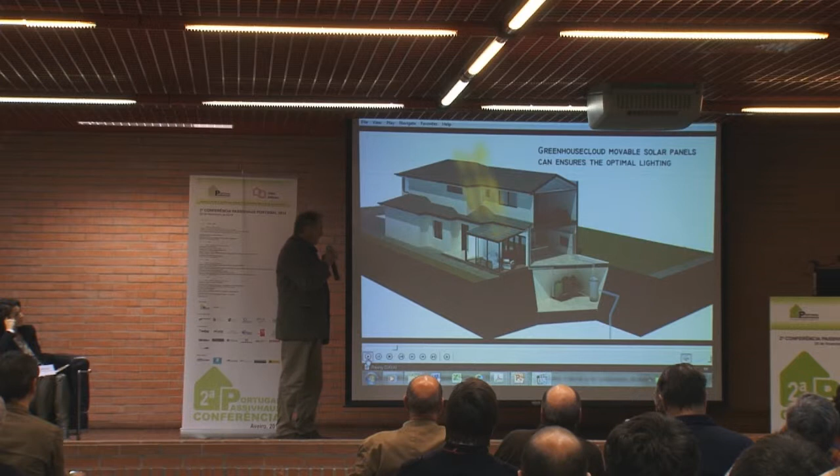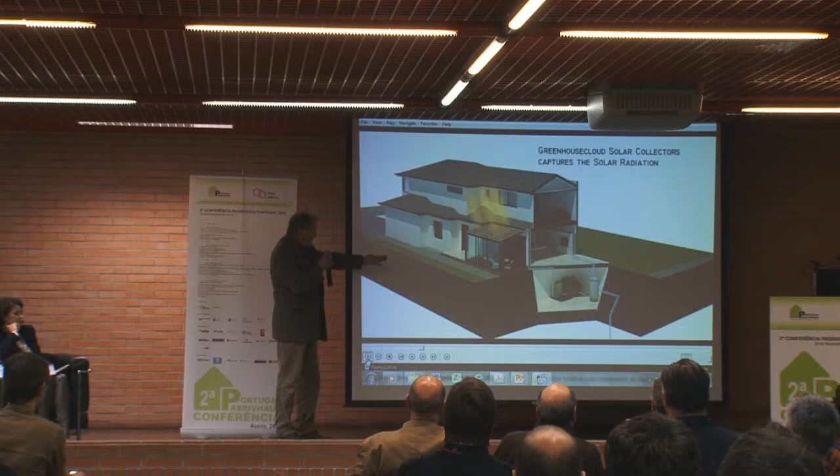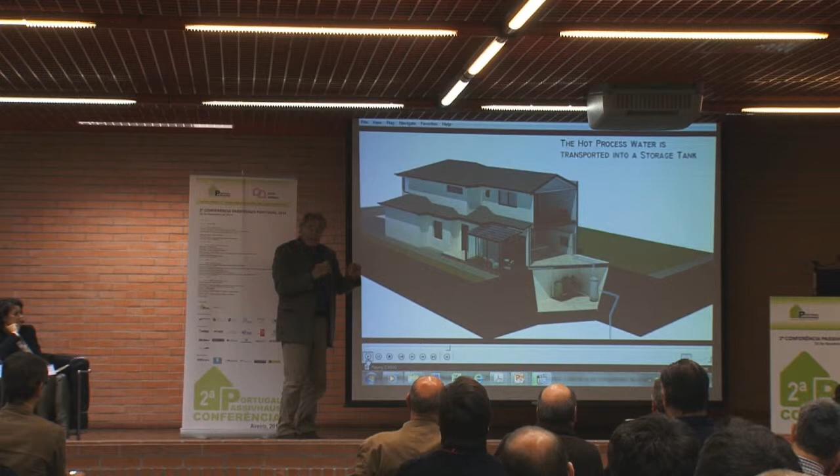So schematically, we see the winter garden here, and the sunlight falling on it. I will explain a little bit more later how we are filtering this radiation. A little part is coming in because, as you know, if you have full sunshine, you have about 100,000 lux of radiation, and you need only 2,000 lux maximum for our eyes. So if you have 2% transmittance, the rest is changed into heat.

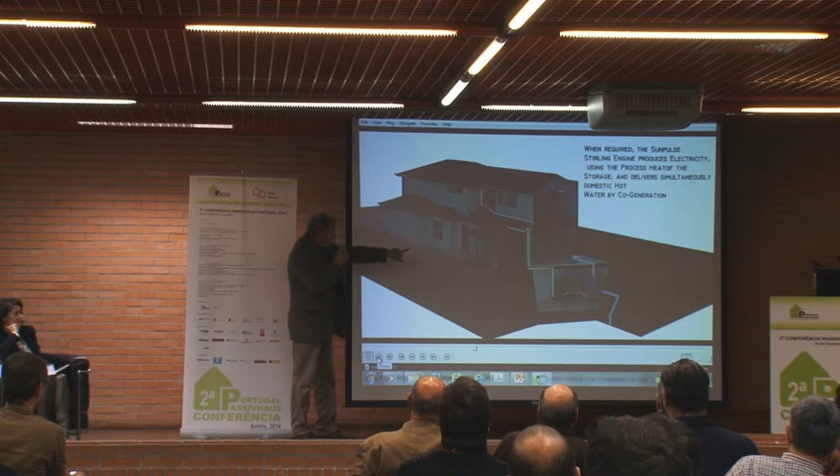That heat is going into storage. We developed, together with Tamera, very novel types of low temperature Stirling engines which are already capable of running on heat between 80 and 150 degrees centigrade, producing day and night electric power, and at the same time, as a cogeneration system, providing all the heat required in such a house, which is symbolized here.

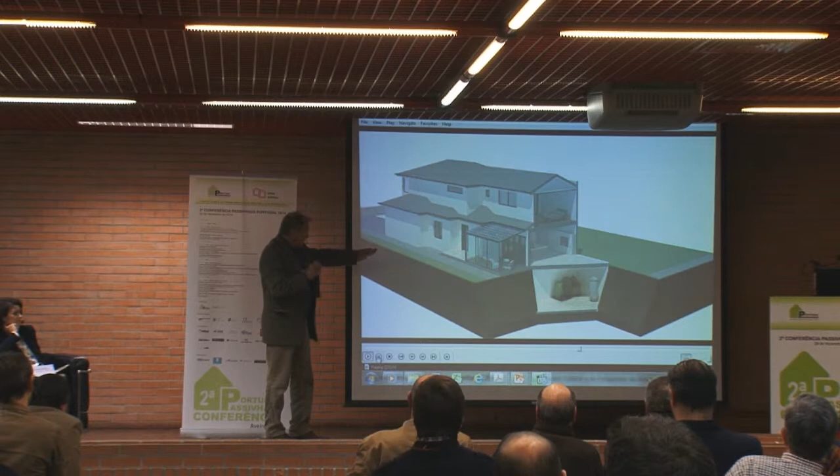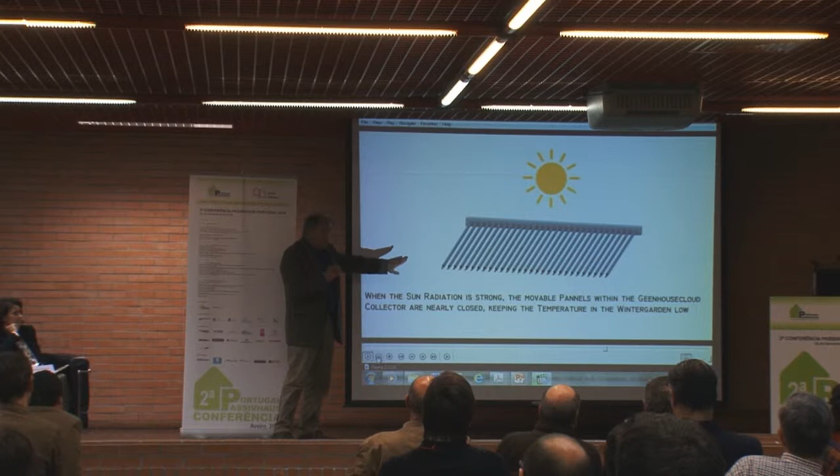As I will explain a little bit later, we can build such an envelope. Now we are coming to a little picture. You see here schematically evacuated tubes which have a U value better than any insulation you can describe, but which have movable elements inside.

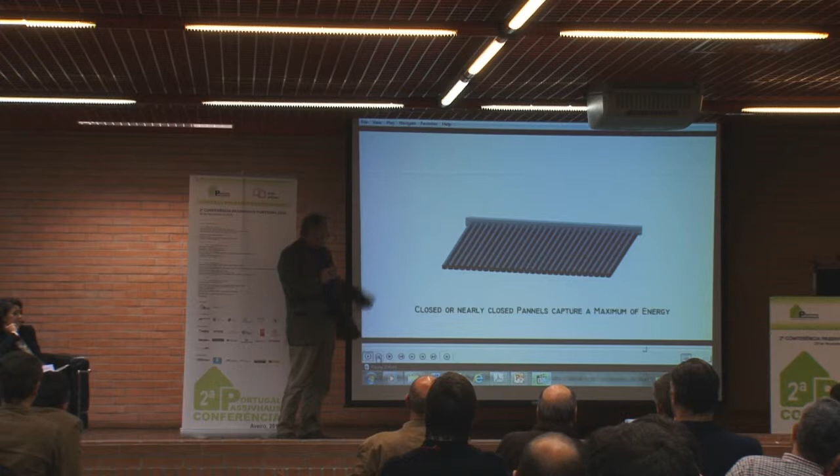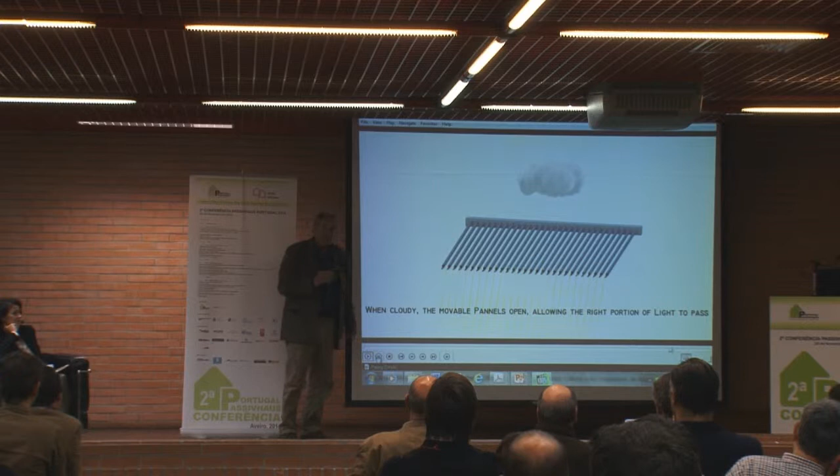These movable elements are the producers of heat energy. You can produce heat at 150 degrees centigrade, pressurized hot water at 5 bar, with 50% efficiency. Some of them are photovoltaic, used directly when there is enough sunlight to produce electricity. The weak point of photovoltaics is the storage, as you all know, in terms of cost.

Therefore... what happens? The movie is finished.

The combination of a thermal system which stores the heat coming out of such an envelope as low temperature heat, transforming it day and night into electricity, into cooling, or whatever you want, while taking advantage daytime of the very low cost of photovoltaics today, is a good approach. At the same time, turning these lamellas controls exactly the amount of light you need coming in.

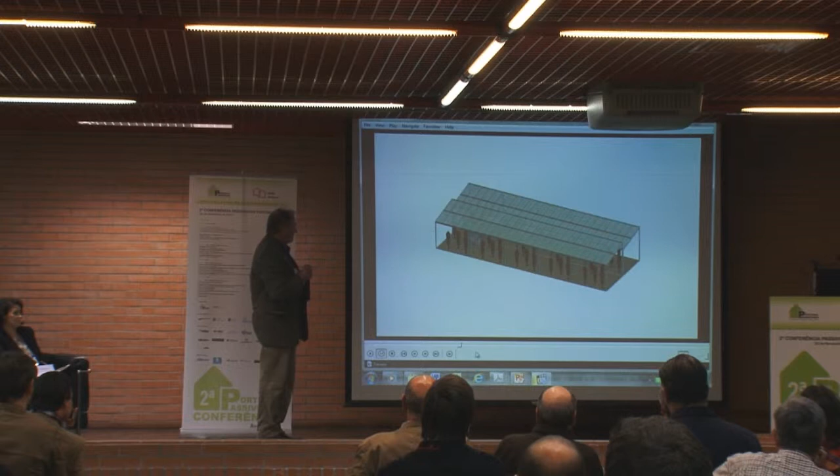Now we are going to show, I think, okay. Yeah, let's move in. You see, let's go to the Stirling engine. Of course, such things can be built as pergolas for plants and so on.

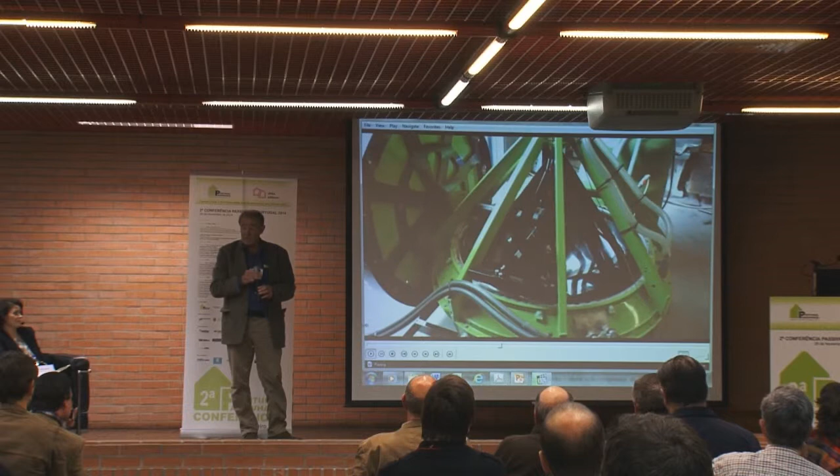Here you see, just from the lab, an example of a low temperature Stirling engine, which in this case is run from the heat of only 80 degrees centigrade from the factory where we produce it, and it's pumping water.

So the design point is 150 degrees, and we have such engines at the moment in the power range between half a kilowatt and 2.5 kilowatt.

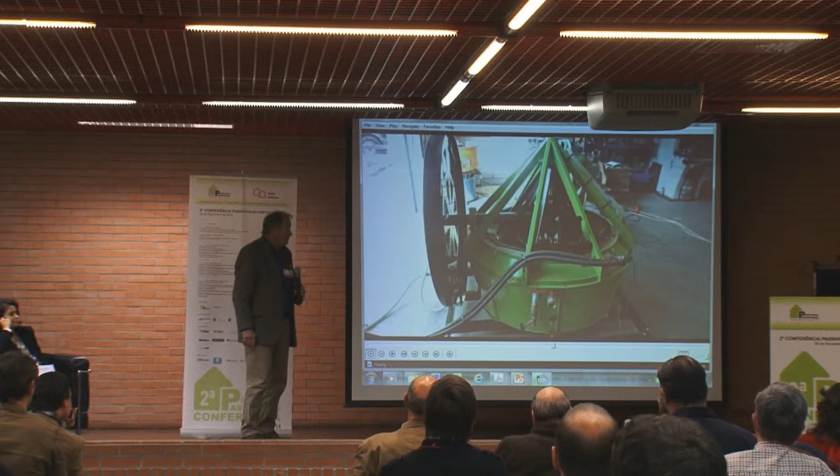Stirling engines are very simple engines, and we developed them to be capable of working already at very low temperatures. They are simply filled with ambient air and have two heat exchangers: one taking heat from the hot storage, and the other, the cold heat exchanger, delivering hot water to the house.

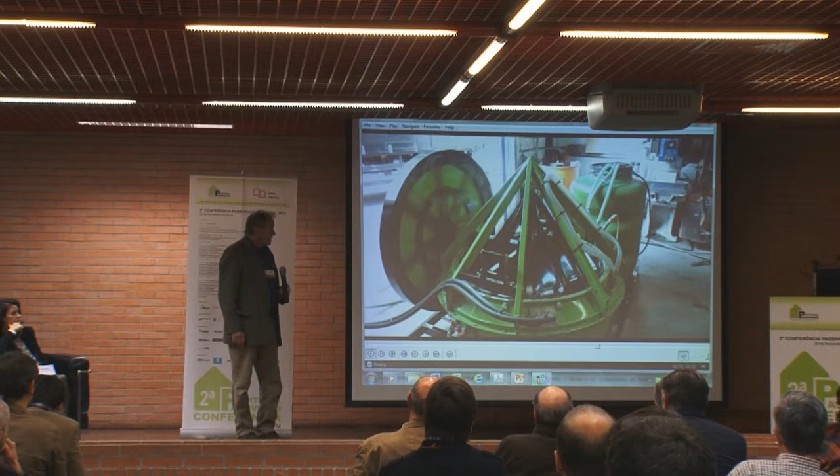With Tamera, we are bringing such systems into the platform, and we are looking for industrial contacts to produce it locally in Portugal in this case, but also in many other countries in the world.

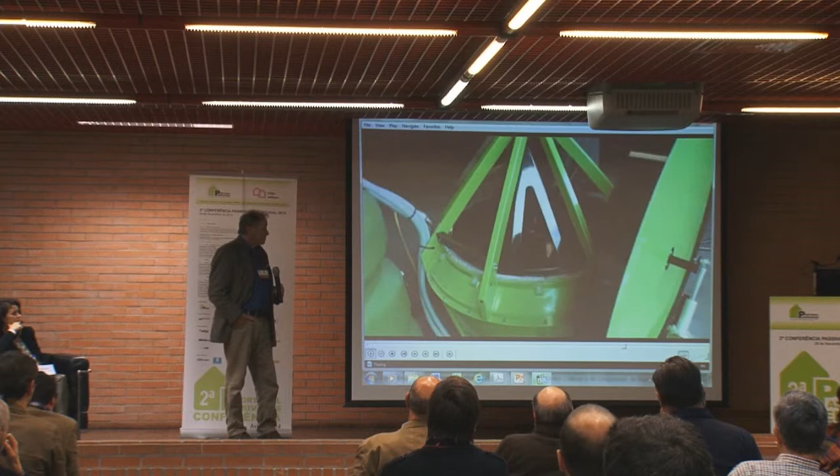So the thermodynamics, if you speak about Stirling engines, are excellent, because this is a so-called reversible, practically ideal thermodynamic engine, and especially if you build it with low pressures and relatively low frequency, you reach nearly the theoretically possible Carnot efficiencies.

Therefore, they work at efficiencies better than or equal to the best solar cells, but at the same time they deliver heat, and they can run day and night out of storages, simple heat storages.

Okay, what are we showing now? We can go for the PowerPoint. Okay, how many minutes do I still have? 15, okay, fine.

So I'm not going to bore you with too much detail, but just to tell you, our envelope and your envelope are brothers. Only in our envelope we have movable parts taking care of the light flux.

If you can build economically, which is what we discussed, panels which are vacuum insulated and meet the price target, which is what we are doing, you control the light. Imagine you have full light, maybe a roof like this, or a wall like this: you close nearly completely your lids, automatically you extract all the energy because you have the highest absorption surface, and you let just so much light in as you need, 1 to 2% for our eyes, giving you natural daylight.

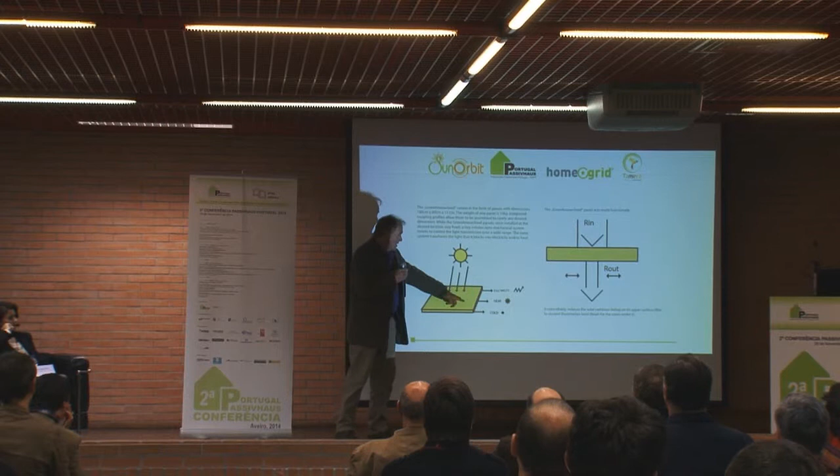Let's go a little bit into pictures. So what we say is: we have a filter. This filter lets pass through the light we require in a variable way, and we extract out of it all the technical energy we need.

Light is something wonderful. So far we just spoke about 1 kilowatt incident radiation, but if we look into the spectrum, we can start doing really wonders. First, we have to diffuse the light, which is much better for plants and also for humans, reducing glare in our eyes. So we have diffusers in our filters.

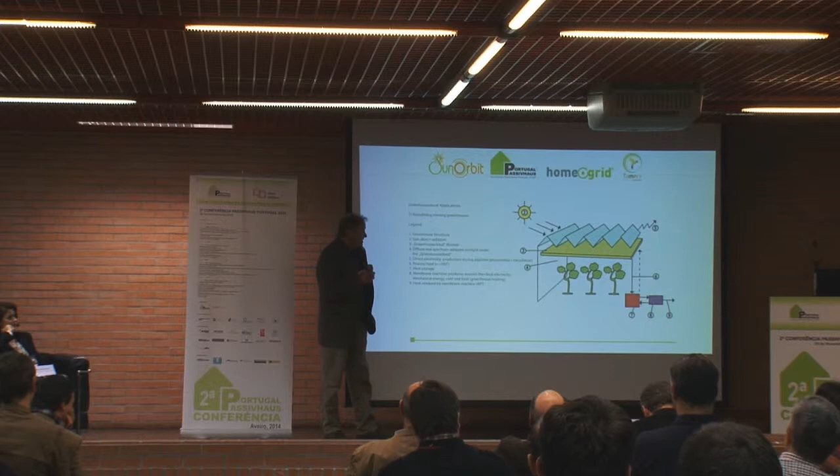Here it's shown how we can put this into greenhouses schematically. We spoke about the pizza oven - we are just planting in Australia a 550 square meter envelope power greenhouse, as we call it, on the second floor of an existing industrial building. Since we have the heat in our storage, it's not only useful to produce electricity or power via thermodynamics, it's also useful for cooking and baking.

We have shown this is very interesting: if you take such a storage of about 10 liters, between 200 degrees maximum and 100 degrees which is usable, it provides about 1 kilowatt hour of heating power - as much as a 1 kilowatt electric plate for 1 hour. So in a storage of some thousand liters, you can cook for hundreds of persons, and even run a pizza oven. I would like to do this.

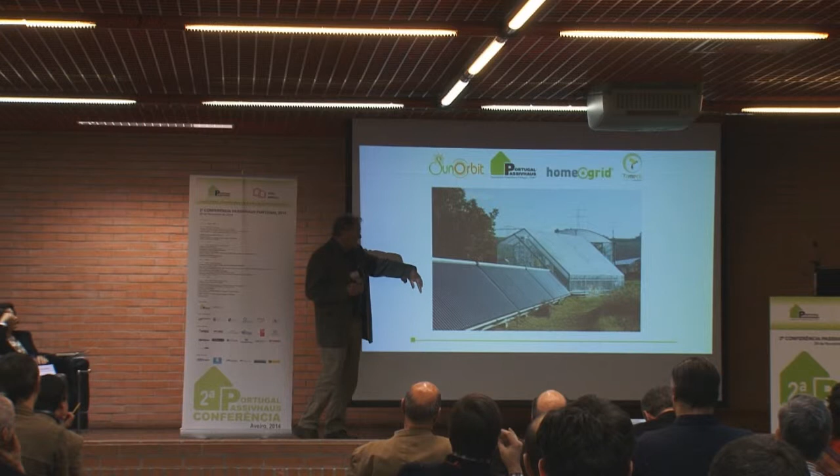That we have shown, I think this we have seen. In our little platform in Germany, we show all these principles with different envelopes.

It was stressed, the intelligence of the human race - which I'm not so sure is general, looking at how development takes place, but certainly for all persons here we can attribute it. If we combine ideas, starting from a solid base like the passive house, which is wonderful, and add step by step such elements with our fantasy, adapting it locally - that was the principle of nature, to be adaptive. This is cybernetics. We come to cybernetic systems.

So, last dream - you said I was considered a visionary. In Germany we had a chancellor who said if you are visionary, like Schmidt said about Brandt, Willy Brandt, you have to go to a fool's house. But we know it's not like this.

So imagine, inside an envelope power greenhouse with living persons like us, an architecture with two rooms: an outer envelope with all these controlling devices, and inside, in-house, one of your passive houses. Then you go out of the passive house and you are surrounded by plants. And the controller of the whole system is the plant itself.